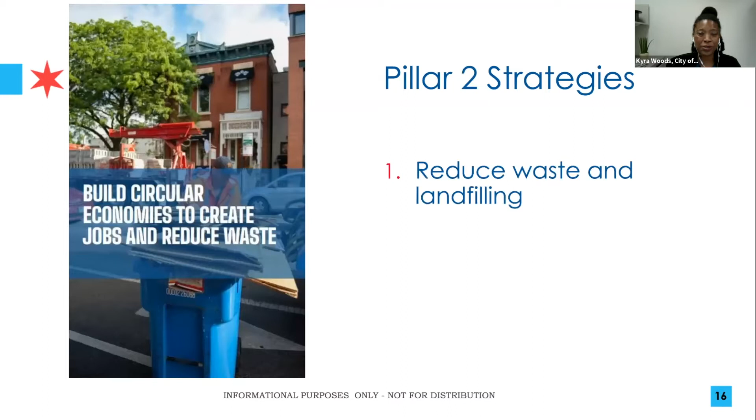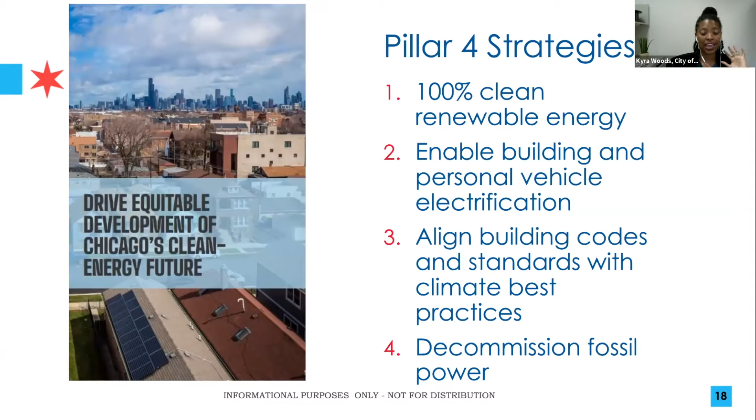I won't belabor all of the pillars or walk you through all of the strategies, but I did want to at least allow you to see them. There are 5 pillars that anchor the CAP, and we are really focused on ensuring that they are stitched together in a meaningful way to be a guiding light to the work that's ahead. I just shared what that first pillar was. This last pillar is also important, particularly to the community that we have online tonight, as we think about strengthening our communities and protecting health. The work that you lead as a part of PHA Live and the greater Passive House community is about more than just building better; it is truly thinking about how our communities are resilient, healthy, comfortable, and ready for the future ahead.

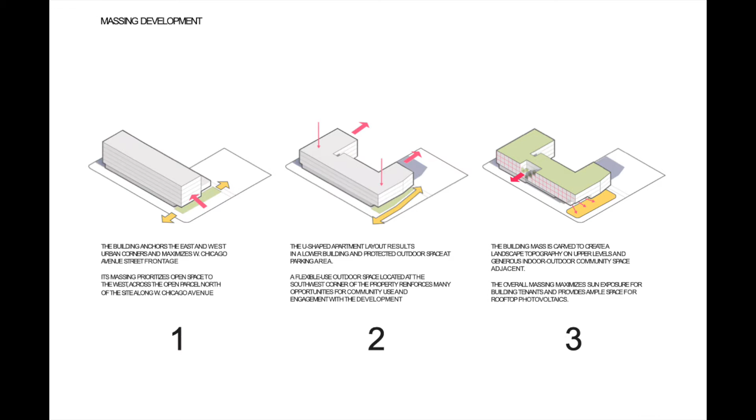So as we move through, you'll see a couple shots that show the existing conditions. The project site, as I mentioned, is along a major corridor in Chicago called Chicago Avenue. This is a transit-served corridor in between two minor streets. This location was also intentional because it is in a transit-served district, looking at another one of Chicago's policies, which is ETOD, transit-oriented development, and the E is equity. So in creating an affordable housing development that has sustainable strategies incorporated into it, we're also accomplishing another initiative, which is providing transit service for those that are currently underserved.

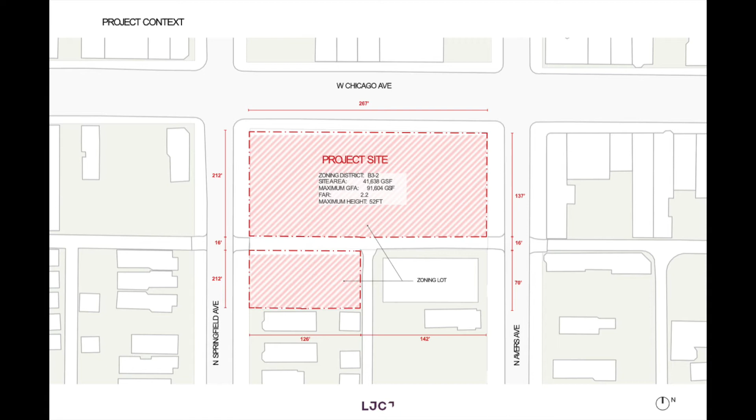As most of you probably know, transit takes up a significant component of the annual budget in low-income households. Similarly, energy costs are the second thing that low-income families spend a lot of their income on. And so this project also accomplishes goals of lowering energy bills for its residents. This is an affordable housing development, and also creating additional transit opportunities to increase mobility from this development to other locations in the city. This is just a couple photos of the project context.

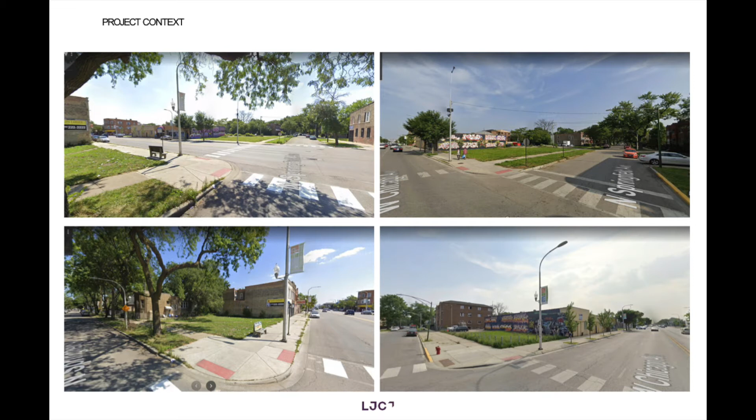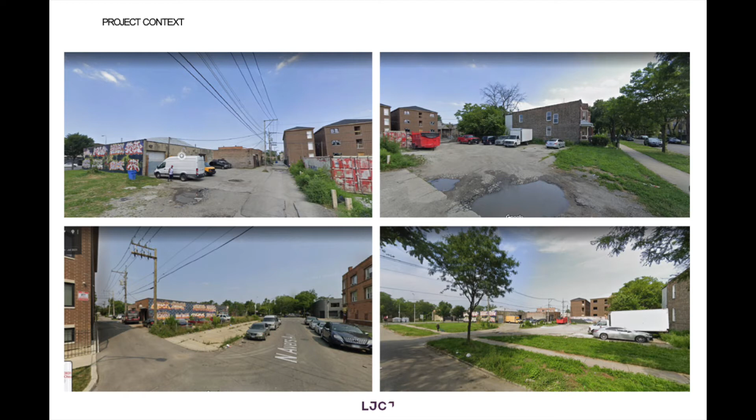The west side of Chicago is littered with vacant lots. Fun fact, if you totaled up all of the vacant lots in the city of Chicago, it would be the size of the entire Loop, which is our downtown area. So beginning to look at infill opportunities, particularly for affordable housing and mixed-use developments, really is a catalyst for future development.

The next slide, I believe, is a site plan of our building. There we go. So this is the site plan. It's a 60-unit affordable housing building. It is mixed use. On the first floor, spaces will be community oriented, and we'll also have a grocery store and cafe.

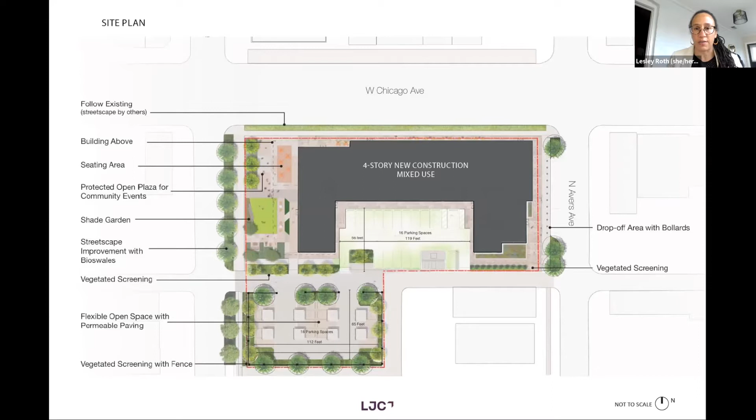The outdoor spaces that you're seeing are meant for public gathering. They are on the west side of the building. The east side of the building is the residential entry, and Chicago Avenue is the front face of the building that will have entry into the commercial spaces in the building. This is the exterior of the building. This is the Chicago Avenue facade that you're seeing, as well as the west side of the building with the public plaza and gathering areas.

Some of the things that you'll notice about this building is that there was really a challenge on the design team to provide a response that accomplished the team's goals of sustainability, but also balanced the community need. This is really a new best practice in the city of Chicago. There's not another affordable housing development that will have Phius certification. We are also going for Enterprise Green Communities Plus certification.

Kyra and her team have done a really great job in creating the climate action plan. We also have a sustainable development policy that this project will be a part of, as well as consistent with ETOD. So balancing the design and policy regulations with a beautiful design was a challenge, and we hope that this is a new best practice in the city of Chicago.

I'll quickly go through the floor plans. As I mentioned, we're sort of at the end of DD right now, so you're going to see some technical drawings. The first floor is primarily the commercial spaces in the building with the residential entry on the east side. We intentionally separated public entry from residential because of safety and security issues, and also to make sure that residents had a celebratory entrance that was separate from the public so that it encouraged ownership of the building, and that the public entries, if the residents wanted to use those, would be by choice.

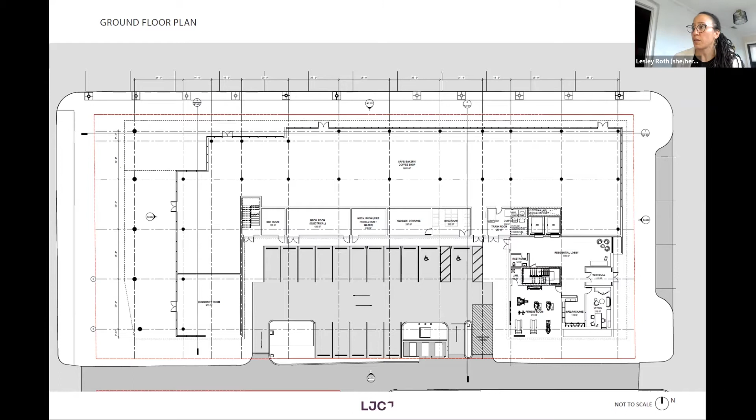There are 3 levels of residential. I'll show the facade again, but there is this kind of carving out of the front facade that happens on all of the floors. This is to let more light into the units. And so the unit mix on each one of these levels is approximately 20. It's a little bit more on some floors than others. The design of the units and the unit mix on each one of the floors also was dictated in part by wanting to maximize energy efficiency and also locate units where they were best suited inside the building.

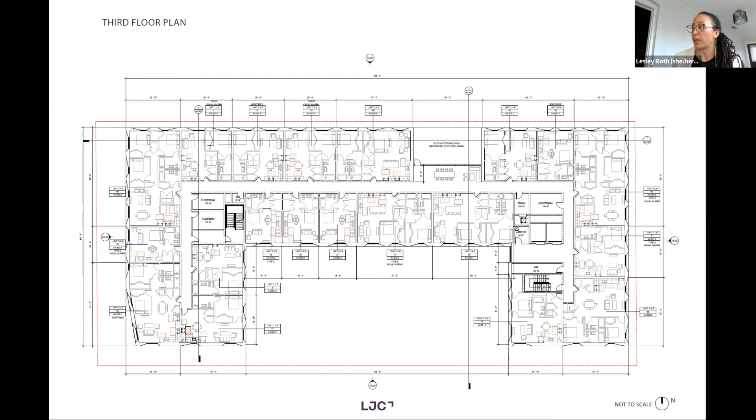Each one of the floors of the building has its own storage. There's amenities within each floor of the building, and the roof of the building will have solar panels as well. There we go. So let's dig into the envelope a little bit.

When we started this project, we knew that it was going to be different for the city of Chicago. In our introductions at the beginning of this session, I learned that there are a number of different countries all over the planet that are having similar regulatory issues when it comes to high performance buildings. Chicago is no different. As most of you know, this is a very steep learning curve for any municipality. When we started this project, we knew that we wanted it to be beautiful and we knew we wanted it to be high performance. And AJ also had a budget that this all had to fit into. So trying to find design elements that fit into the project constraints was a challenge for the design team.

And in working with our Department of Buildings, with our Department of Planning and Development, there's been a lot of flexibility and a lot of conversations around how to make this a precedent for future buildings, and also helping understand what the value of this type of building in a neighborhood that's been underinvested for decades, for generations, means to the people that live there. You can read the notes here. We're going to have a question and answer period, so we can talk more there.

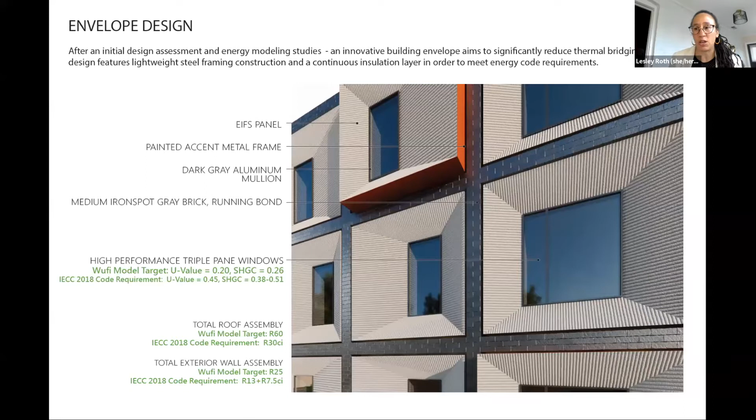Right now, the building has about 20% glazed area, and you'll notice on this facade that there are some recesses of windows. This was a challenge for the design team and our sustainability consultants to figure out how to create thermal breaks, how to insulate these walls, and how to have separation between the wall and floor that maintained the envelope values that we wanted to maintain, as well as lowered the energy costs for the building as a whole.

The Phius certification will be for the residential floors. There is a break between the first floor and the upper floors. The first floor will not hold that certification.

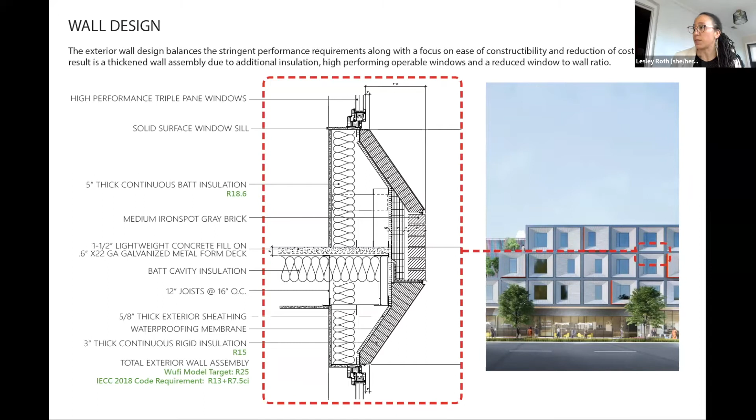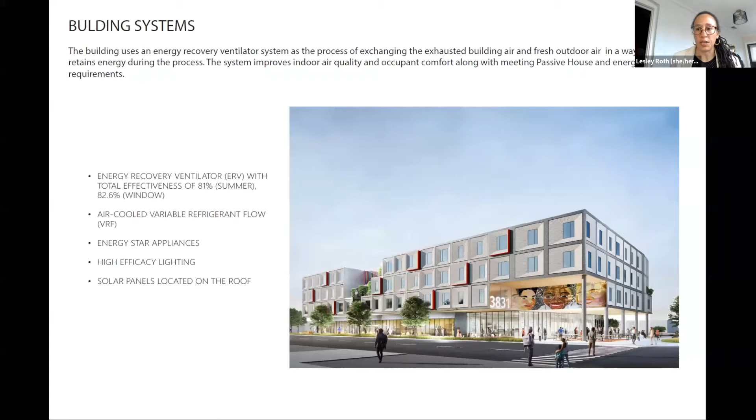A few bullets on the energy, on the building systems that we're using here. We are using ERV. Of course, there'll be Energy Star appliances. We see these as a base level for entry in energy efficiency, but a necessary part in achieving Phius certification. As I mentioned, there will be solar panels that are located on the roof. And because we're also applying for concurrent certifications with the Enterprise Green Communities, the interior, the fixtures, finishes, and furnishings in the building also have performance standards, including low VOC, to improve indoor air quality.

As we've been going through this process, we've been checking the design development of the building against our WUFI model and making sure that we're hitting the standards for Phius certification. This is just a printout of some of the data that we're finding here. Really, when we began this process, we had a lot more glazing. We reduced that significantly by almost 20%. So now the building as a whole is about 20% glazed.

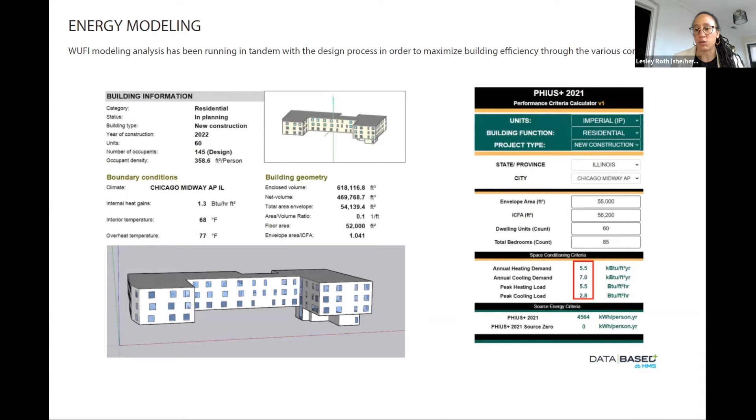There's also, as we move through this design process, trade-offs between meeting the energy efficiency goals and the cost of the building overall. I think I saw a question in the chat about that. In Chicago, this building is actually costing not significantly more than a conventionally designed and built mixed-use building of similar size by square footage costs. And so again, in creating these best practices, the narrative around what it means to create a really beautiful and high performance building is changing.

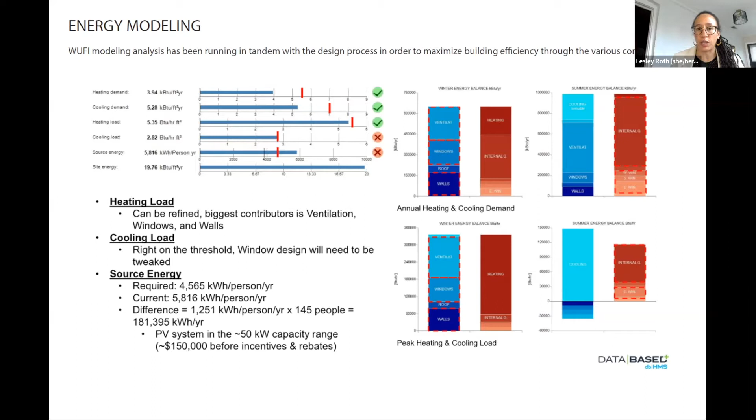A few more shots of our WUFI model and what we're learning when we talk to our engineers. This has significantly changed the design of our MEP systems, as well as going through Chicago's pilot plumbing program, because the code requirements are not consistent with Phius. Similarly with air exchanges, this has been another lesson learned for the city of Chicago as we move through this process, in understanding what those tolerances are and how we can work together to continue to create a sustainable future. So this is our beautiful building.

I think that was about 5 minutes. I could talk forever about this building, but it's really been a wonderful experience to work on a building of this type. We know that the type of building that it is, affordable housing, mixed use, and the level of equity that this building is able to accomplish is unparalleled. This will be one of very, very few. I think Doug's building is the only other Phius certified or potentially Phius certified building in the city of Chicago. So we look forward to continuing on this trajectory, and thrilled to be working with AJ leading the way.

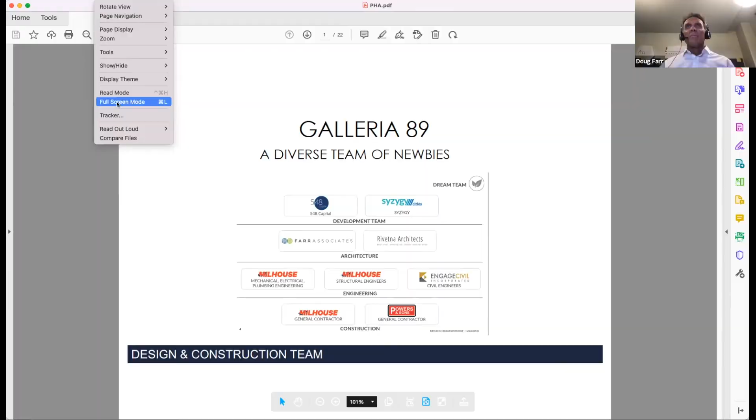Yeah. So now Doug's going to talk about our second project. I'm going to dive further later in the conversation about Lesley and I's relationship, how that came to be, and the same with Doug and I's, which both are awesome stories. So Doug, feel free to jump in, and then I'll close the show. Thanks, AJ. Thanks, Lesley. Great presentation. I haven't seen the building in a few months, so really loving it. So let's compare notes offline.

But if everyone can see here, I met AJ in the before times, pre-COVID, at a coffee shop. I couldn't tell you what year, 18 or 19, something like that. And we bonded over his 548 story and my passion for high performance buildings. And the conversation then was, let's do Phius, and one more thing, let's do an all electric building. And so that's what we're doing.

And the other part of the conversation was, I said, look, we work with the same consultants over and over because I'm comfortable with them. We've been training each other for 15 or 20 years, and there aren't folks of color that are part of that business proposition. He said, well, I challenge you, let's reach out and work with a more diverse team. And so here's the team, and it's been a challenge because we've done Phius a few times, but the rest of the team had not. And so it's been a real learning curve for all of us, and I hope that's part of what we cover in the Q&A.

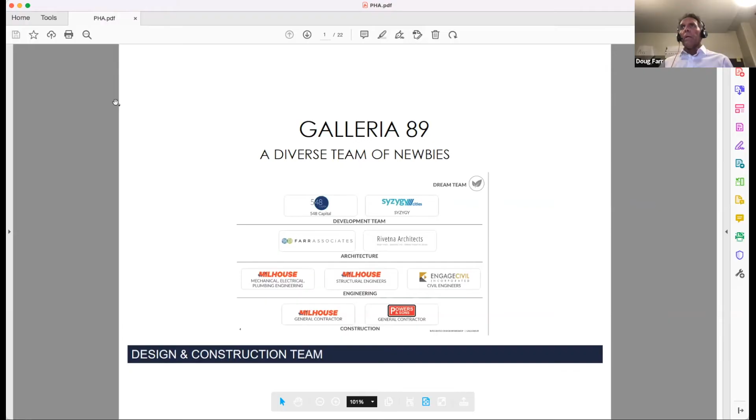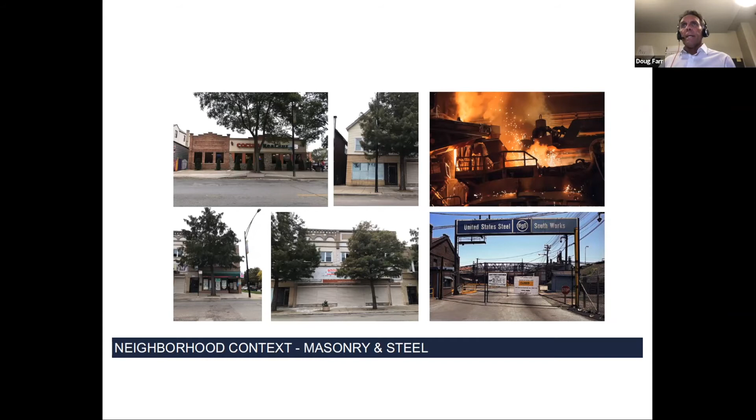Here's the context for the second project, 8900 South Commercial. It is a part of Chicago that was highly industrial. There are steel mills right there on the lake, which have long since closed down. But our affiliate architect, Cyrus Rivetna, was really inspired by the steel aesthetic of that part of town, and then a brick aesthetic that fits the context. Here's our site, a corner site and block site, and it combines a new construction building, which will be the Phius building, plus a renovation of an existing building, creating a courtyard between the two.

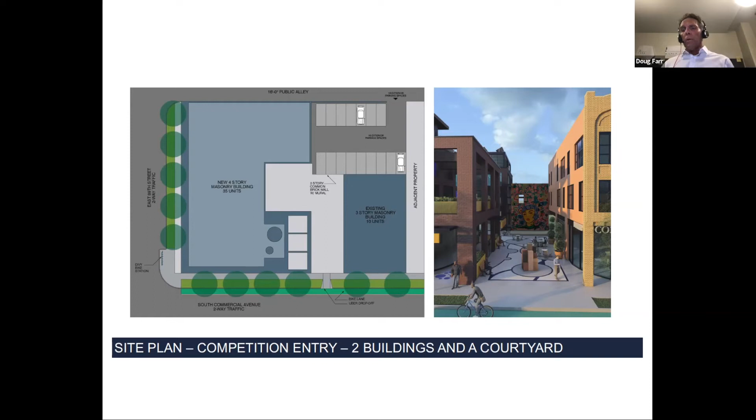These are images from our competition. As I said, we were not involved. Cyrus was the winner, and so we really honor his work. But I want to take you through it with a Phius filter on this work, and you can see I'm really excited, and then some days I'm challenged. So here's the original RFP. I will always show the existing building on the right. It is aspiring to some energy performance, but not Phius. The building on the left is the one that I'll talk about over and over.

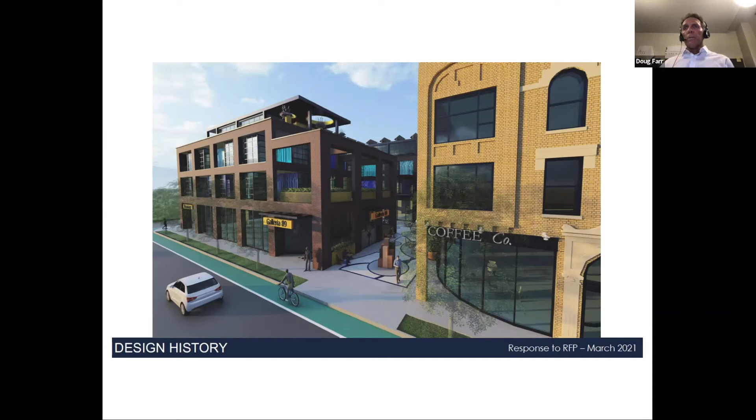This is the original competition entry, fairly regular facade, brick and glass, probably overglazed, but workable. That's the one the city saw and approved, the community saw and approved. Cyrus continued to innovate. So when we got involved in October of 2021, this had turned into that. It's the same building site. This is what I call the sugar cube project. And I'm thinking like Phius now: it favors simple assemblies, stacking things, and minimizing surface to volume ratio. And then we've got absolutely Piranesian flying buttresses and everything.

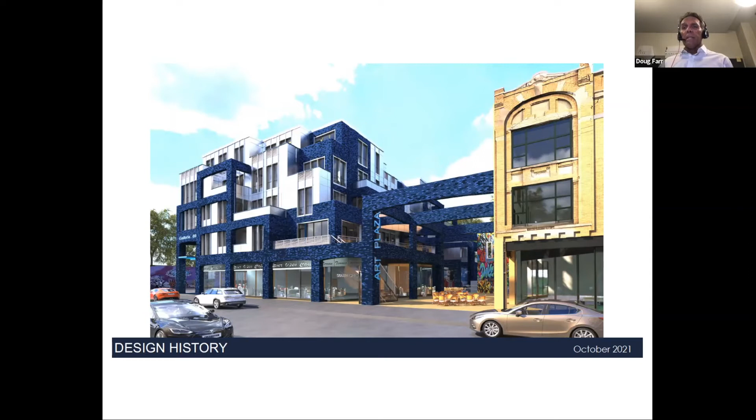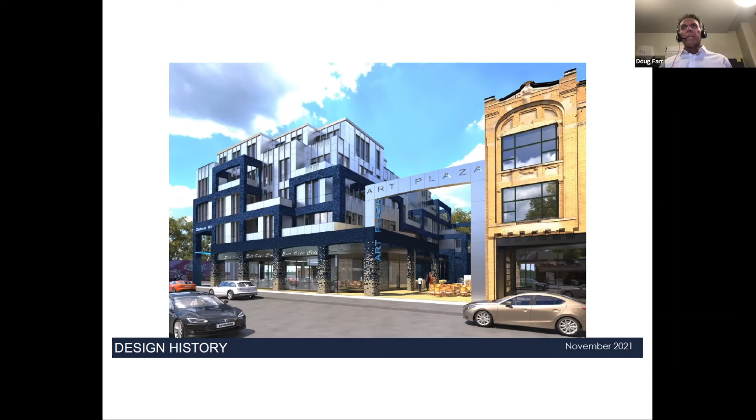So we worked with Cyrus: can your aesthetic succeed with simplifications? And his simplification went from this to this. If you look closely, it was brick and metal panel in the first one. He mostly pulled the brick to the ground, but he really loved that sculptural shape, and it was really hard to do. So we got involved and said, Cyrus, let's simplify, let's stack things, let's make things more regular. And this is kind of where he handed off to us.

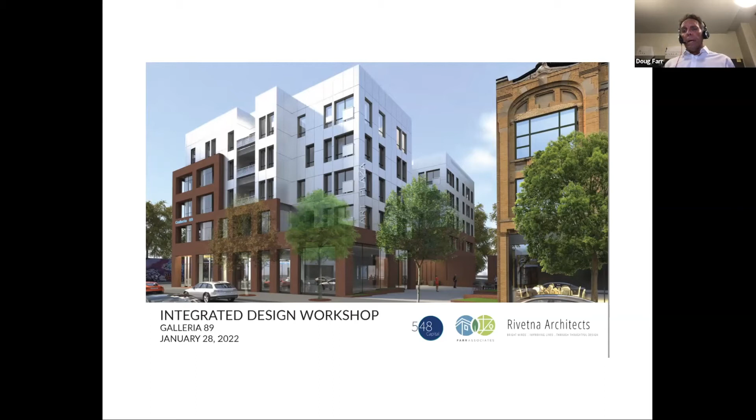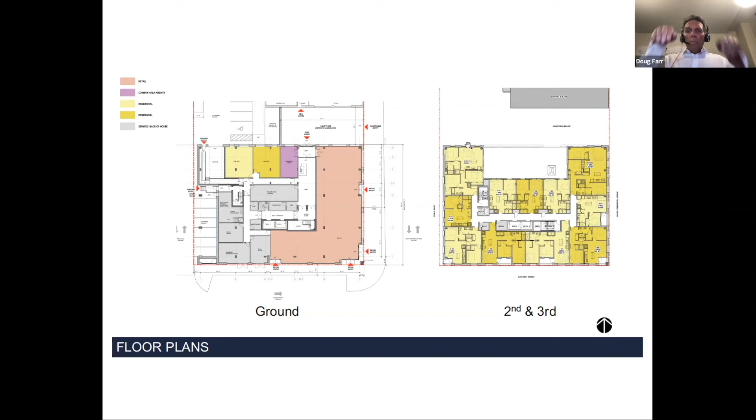We then initiated an integrated design workshop with the whole team. We invited Lesley and her team, thank you for coming. And we led the Phius process the way we would have had we started from scratch, but a lot of honor to Rivetna and their contribution. Briefly, the ground floor occupies the full portion of the site. Commercial is an L-shaped wrap: bank and other institutions, lobby and amenities. The upper floors are a series of U-shaped courtyard buildings with two wings that set back slightly as they go up.

Further to what AJ was saying about the focus and passion about benefits to families, we think we're targeting a 40% lower utility bill. And by going all electric, by not having gas in the building and eliminating gas cooking in particular, asthma risk should go way down. In terms of communicating to a newbie team, they said, what is this Phius thing and what's it going to cost? That's been the conversation and continues to be. We knew we had to optimize windows because we had inset balconies, we knew we had to break them thermally, and then R25 effective wall insulation. So I'll take you through that.

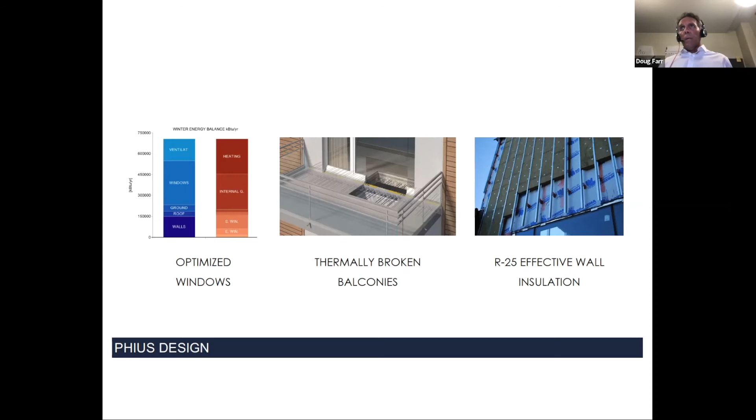We worked with Phius, and if you've never used their services, they have a feasibility study that gets you going. It's really clean and simple. Basically, what they offered us was: if you don't do thermal breaks at the balconies and in the facade, here's your performance numbers, and if you do, here's your lower performance numbers. So it's very cartoony, simple to follow.

Everyone on the team could get that. The crux of it, if you go back a couple slides, it was basically a brick base and some sort of metal panel upper floor. So we really quickly figured out what the detail ought to be. So here's what upper and lower looks like.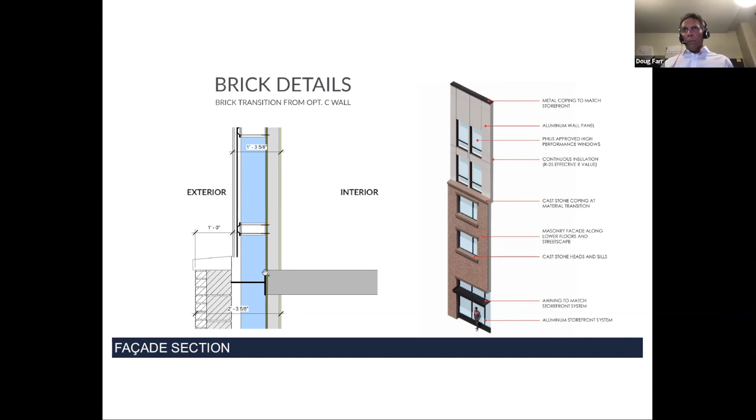But what we figured out is to make a more or less freestanding masonry facade that sits outboard of the continuous air barrier, water barrier, thermal barrier that goes top to bottom in the building. And so it's rational to build. We do need an occasional sort of stiffener back through the thermal breaks and so on, but it's workable. So we're happy with that.

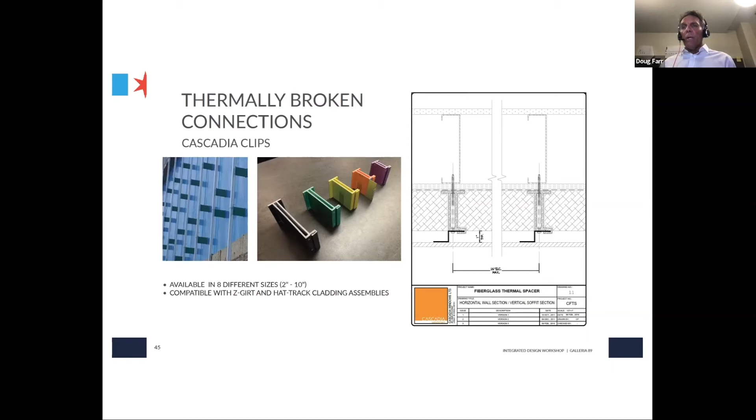We showed the contractors, Milhouse and Powers and Sons, these details, and no one had ever seen them. This is November of 2021. In March of 2022, I talked to the same people and said, Doug, you're now the third project we're looking at that is proposing this similar assembly. And so I'm telling you, Phius has sort of hit Chicago, promptly and rigorously.

So I know this audience, and when I show up to Passive House Accelerator, I always want to know the numbers and the costs. So I wanted to preview these, and AJ may have updated numbers. Generally speaking, this may have changed through negotiation over the last week or two, this new construction we're looking at is something like $360 or $380 per gross square foot. Does that seem about right, AJ? Somewhere in that strike zone. Correct. And that's a function of supply chain, crazy cost premiums, all that kind of stuff.

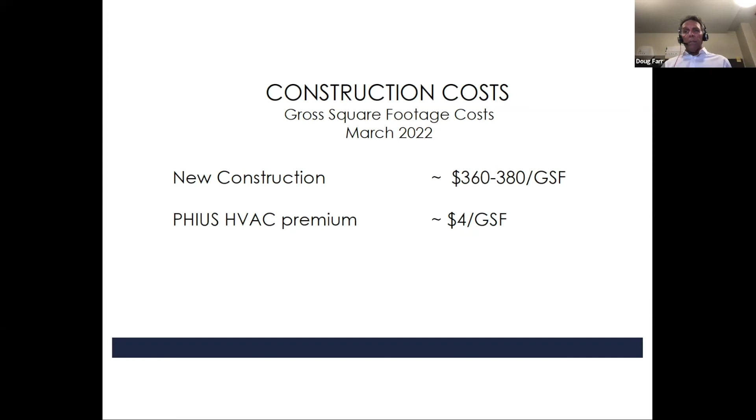What I'm really targeting is the Phius cost premium, because everyone's obsessed with that. Like, what are you paying more because you're doing Phius? And so this is from the GC, our HVAC system, which is understandably just one component. They thought it was about a $4 per gross square foot premium, roughly a 1% premium. And that's to get a full ERV system and all the bells and whistles that go along with the Phius mechanical system.

And then in terms of construction costs, the envelope costs, we're still pulling details out of the GCs, and they're super busy, so we don't get the full love that we'd like. But here's what we got. So for walls where it is opaque wall, we're targeting R25, R30. Here's the cost per square foot of facade. An industrial grade panel, 65, a custom metal panel, 70, and then that lower masonry section, $72 a square foot. They're so darn close, it almost doesn't matter.

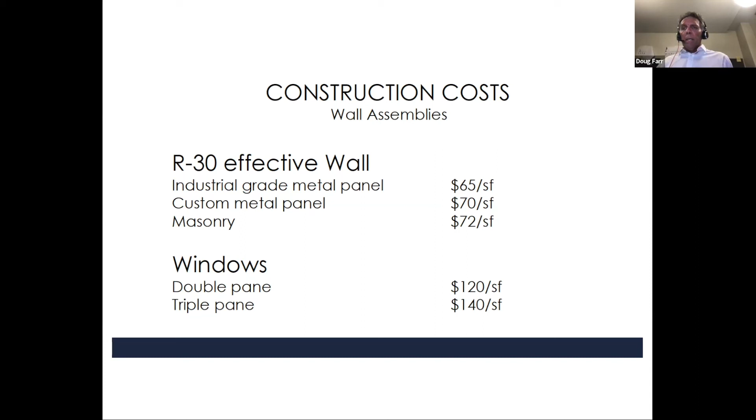But when you compare those to the cost of windows, $120 or $140 a square foot, obviously optimizing the facade is a big deal. We just got the go ahead last week to start that process. We started, like Lesley, much higher; Cyrus's original vision was probably about a 65% facade glass ratio. We took it in and started at 44, and then without breaking a sweat, got to 39, got to 33, and those studies continue. So we're still optimizing performance, cost, facade appearance, all those kinds of things.

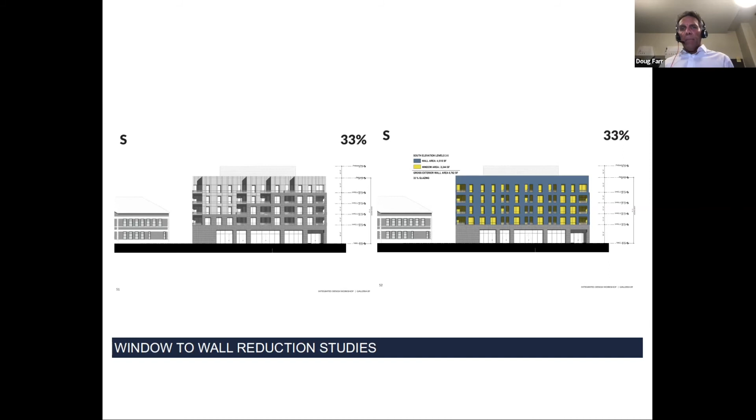So Kim, before we go to the slides, I just want to give a little more context to what we just saw. With Lesley's project, we got a site that's on Chicago Avenue. It's one of the most important corridors in the city of Chicago. Once we got site control, the planning commissioner called me and said, AJ, we're not going to approve you moving forward with the site unless you run an international RFP. We want the best designers in the world to bid on that site to be the lead architect. This site is too important. And so Lesley's team won that RFP, and as you saw, they just knocked it out of the park. I could not be more proud to work with her and her team.

And then Doug, ironically, I met him several years ago, some kid off the street, and I just asked him if he would have coffee with me. And the great Doug Farr had the coffee. And I said, listen, I'm going to grow up someday and we're going to do a project together. And he was gracious with the no-name kid. And then I called him back 3 years later and I said, I'm in the middle of a project.

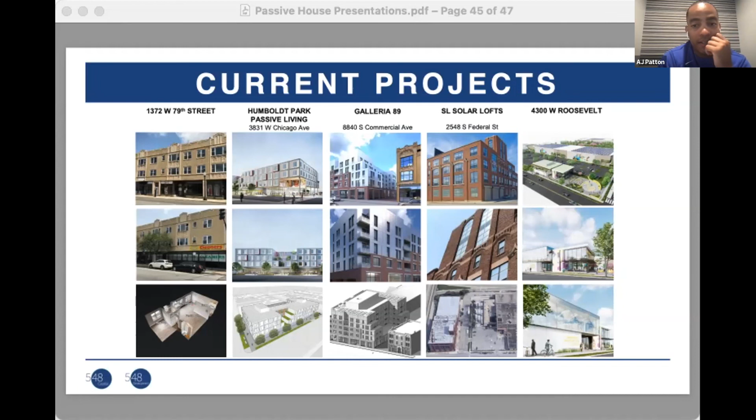And this is just a highlight of geographically where these are. If you know anything about the city of Chicago, it is, frankly, kind of the haves and the have-nots in terms of how these communities have been invested in. And so we've targeted specifically the South and the West sides, the communities that have been disinvested in. We're investing over $180 million of new capital in these communities. And I'm really proud of that. You can go to the next slide. I think it might be the last slide.

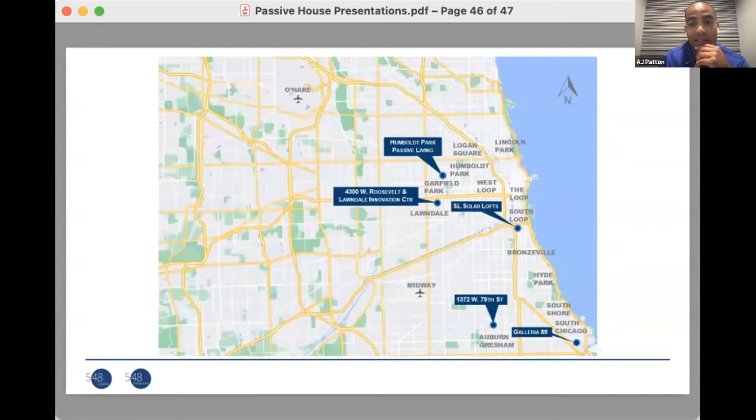And so the goals, you heard Doug talk about the health outcomes. That's important. I had to educate myself on that. And Doug and I have been talking about projects for a handful of years. And that's been something he's been really intentional about: AJ, get those gas stoves out of there. You're carrying the flag. You need to do it in a new way. You need to rethink this. As much as I always grab the microphone and talk about how I'm challenging Doug, Doug's been challenging me too, frankly, on how to look at these things.

And then, one of my other secret passions is, can I flirt with net zero? And can we keep it on budget? Those are my two big things. If I can flirt with net zero and keep it on budget, then I think we've got a real special formula.

And then lastly, who gets those jobs? We've rolled out a workforce training program. We've been really intentional about who gets jobs in construction, design, and then at the labor force, because I'd like my firm to be one of many bridges of sustainability and inclusivity. Those don't have to be separate. We can do all things at once and do it on budget and make the pro forma work.